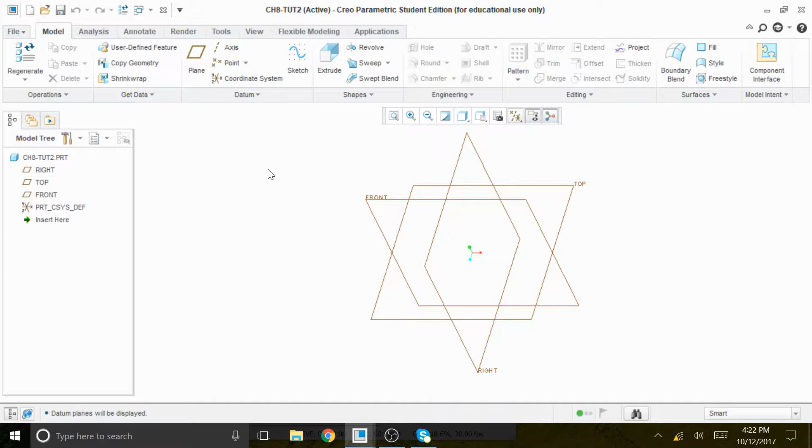We turn the plane on, and we're going to create this octagon on the top datum plane, and the orientation and references should be right. So we're going to do that, and then remove the filter.

This is the secret here: you just place a point at the origin. You don't need x and y axis, just drop a point or place a point there. Then you go to palette, and then you activate the 8-side octagon. Double click, and then you bring it and place it there. Close it.

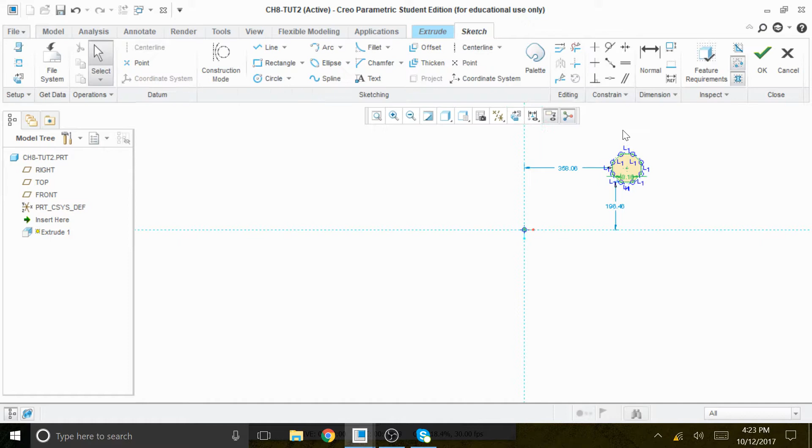Let me see. Okay, so you don't have to do anything, you just say check, and we're gonna coincide. We're gonna go to coincident and click on the center of this octagon and click on where we placed the point, and you can see that we place this octagon here, and then the dimension for the side should be 90. If I delete that 48 to begin with, it's going to give us the dimension of 90.

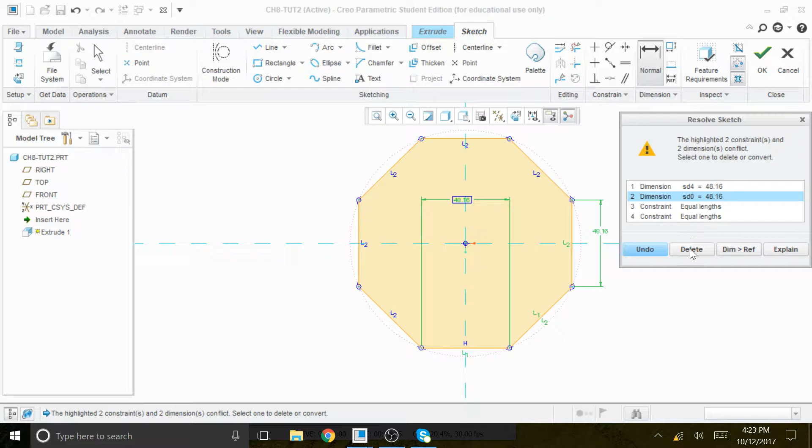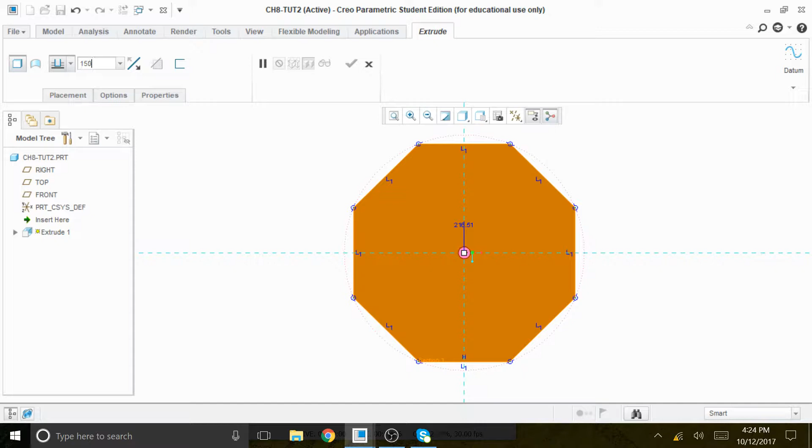48, so we're gonna enter 90. I think that's what it is. All right, 90. And then the amount of extrusion, so now we're going to extrude that about 1500. Yeah, about 1500, so that the total extrusion is 1500. There we go, and now we have this pencil. The body of the pencil is 1500, and this is the front view. That's the front view, and this is the top view.

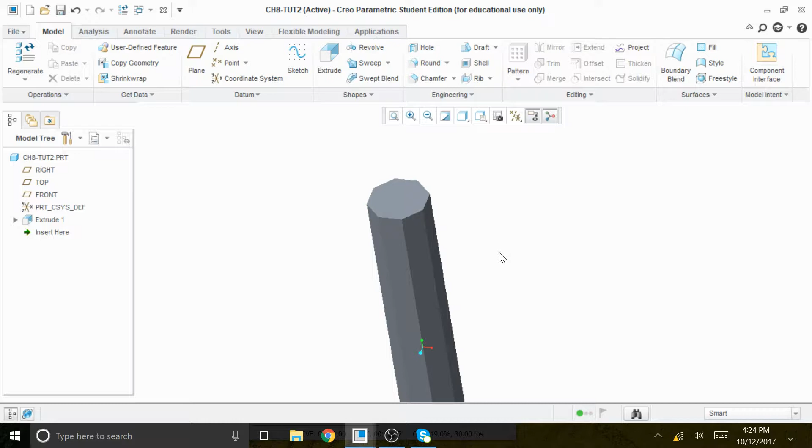Next, we're going to create the next feature. It says creating the second feature: we need to create a circle with a diameter of 120. So we're going to create extrude, placement define on this top surface, and create a circle with a diameter of 120, right?

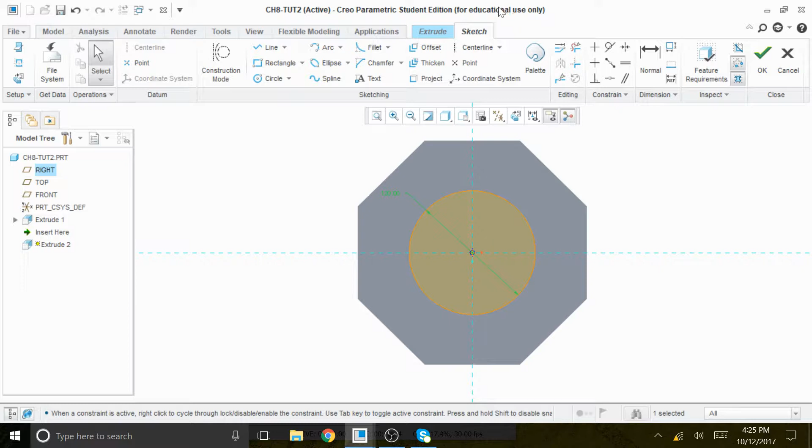120, and this should be extruded upward around 210. So we're going to extrude that in this direction, 210. That's according to the specification, it says just extrude 210, and we are happy with that.

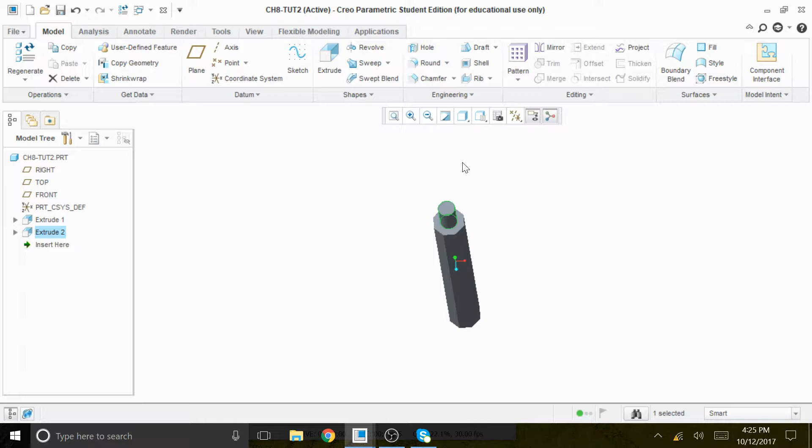All right, so next we're going to use the draft feature. You have never used a draft feature before, but this is the procedure for creating a draft feature. So we're going to go to draft, this is create a draft feature. Click on that command, and then it says select the cylindrical surface of the cylinder. This is the cylindrical portion of the cylinder.

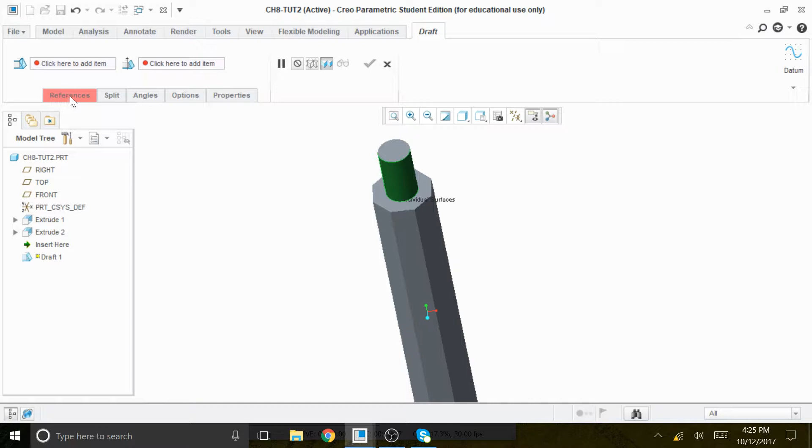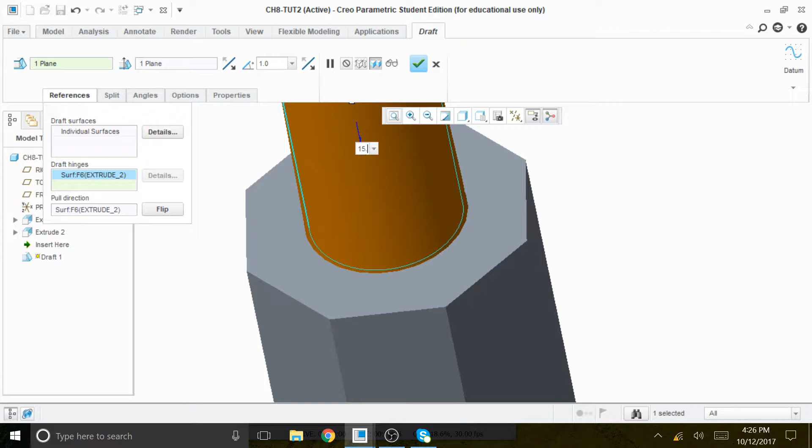Then it says select the cylindrical surface of the cylinder, choose the reference, and then choose the draft hinges. Click on the draft hinges, then select the top face of the cylinder. This is the top face of the cylinder. Then you reverse the arrow, and then give an angle of 15.3 degrees. So you just click on the angle of 15.3. I don't know why they picked that number, but that's the way it is sometimes.

Okay, so that's the hinge. But now we have to go to options and say extend intersects all surfaces. There we go, that looks beautiful, correct? So all right, so that's what we have.

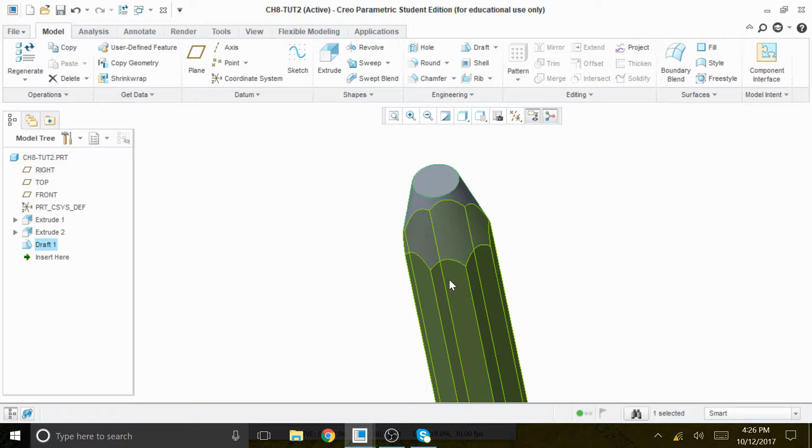Next, we're going to create the tip of the pencil. So in order to do that, we're going to create that on the front datum plane. So we go to—is this revolve?

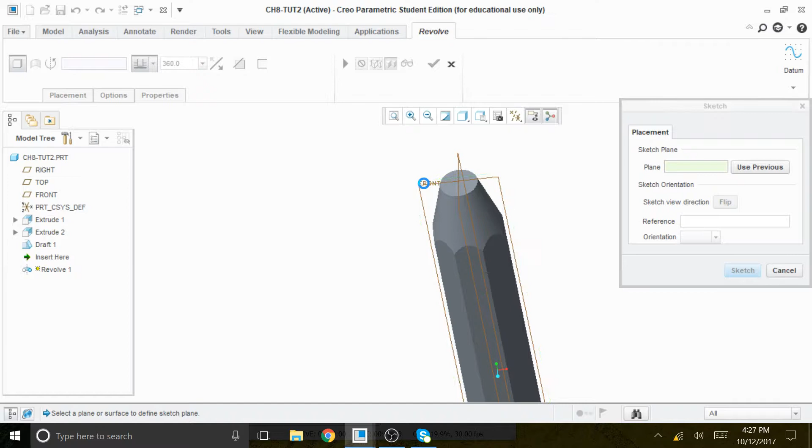We're going to use revolve, placement define on the front datum plane, and then we're going to click on top surface, and then don't forget to orient it to be top, top sketch view. It's going to come toward you, and nicely done. Let me just get rid of all the filter so you can see it.

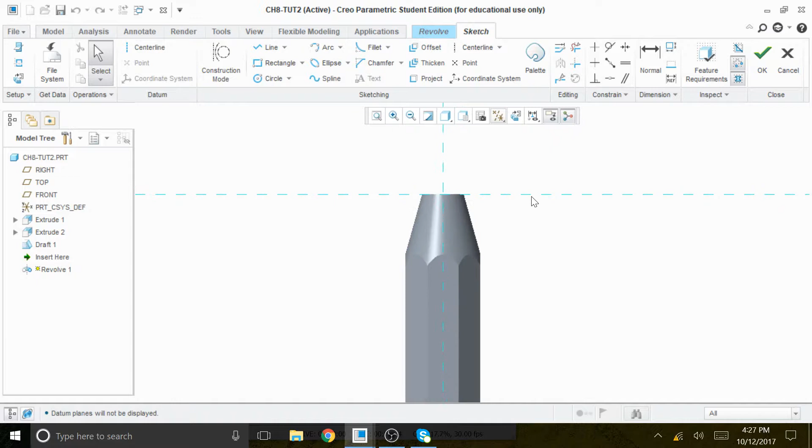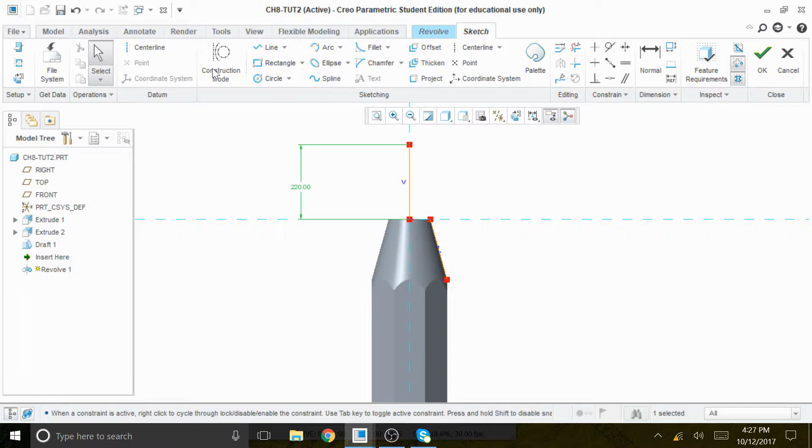Now I'm going to place a project somewhere here. The rest is okay, the references are fine. So we're going to draw a line from here to there, and that should be 220. From there to there is 220. And then we're going to bring it down, from here to here, we go back to the origin.

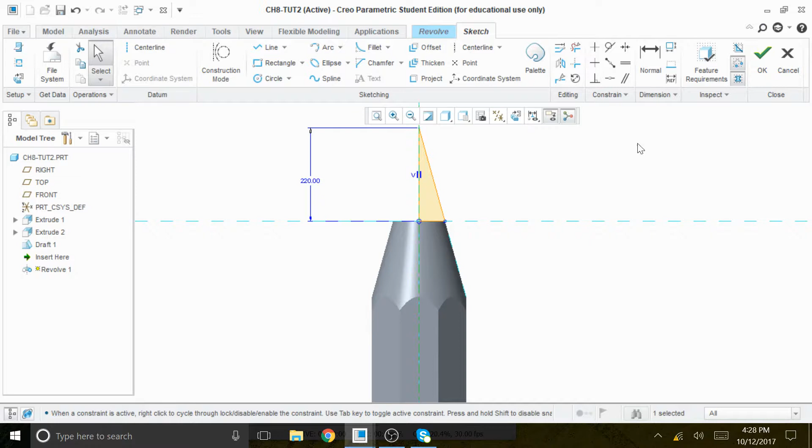So that's a portion of the revolve, and don't forget to remove that temporary line. That's it, that's all you need to do. One thing we forgot to do is the reference axis of symmetry, the symmetrical axis. So when you check it, now you can see that, and this is the tip of the pencil.

And the tip of the pencil we can render it and make it look, any color you want. Maybe we're gonna pick which one is good. This one. Okay, let's see.

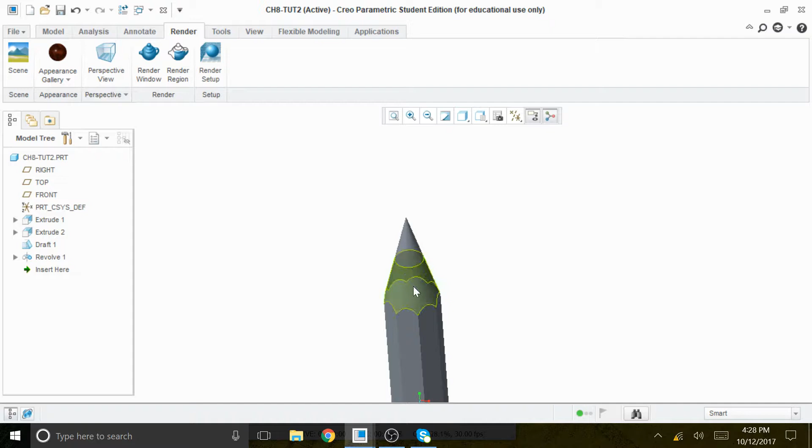Okay, we're gonna pick that to be this one, and then maybe we can pick that to be here. Okay, so that's our pencil for the time being, the top portion of it. Now the bottom portion. Okay, this is the interesting part.

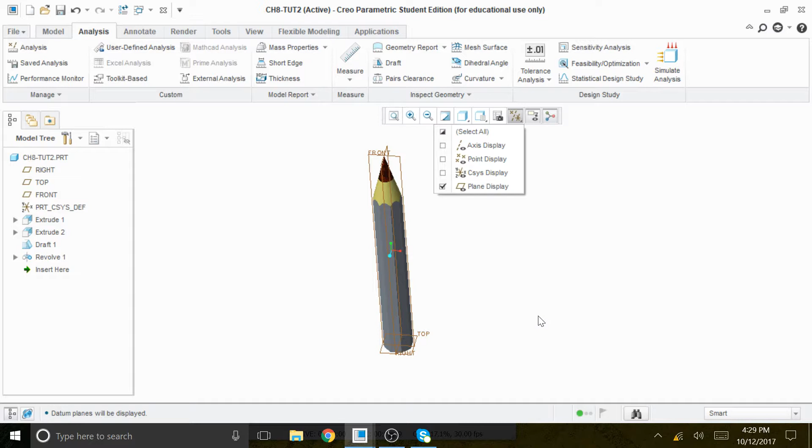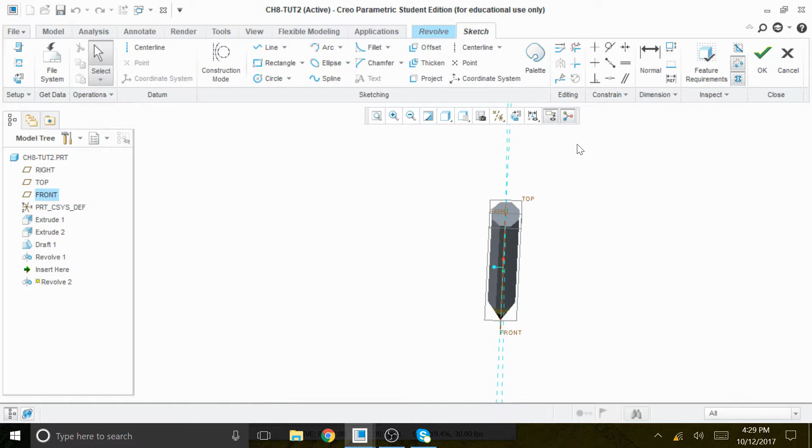Let me activate the plane again, because the bottom of the eraser portion of the pencil, it says again to create this on the frontal plane. Okay, sketch the frontal plane, and this is what I will do. I'm gonna go this way here, click on the model, and we're gonna do the revolve again. Okay, revolve, and then we click on the frontal plane, and then let me see if it's gonna work. Okay, no, I did not like that.

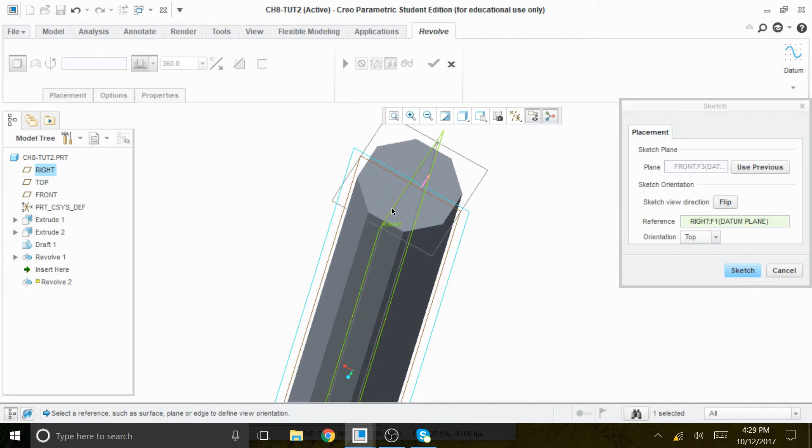So let me just, because it went too fast. So we're gonna go to revolve, placement, define. We're gonna click on the front, and then let me rotate this here a little bit so you can see that. We click on the surface, and then surface, and then top sketch. All right, that's what we want. Okay, that orientation is better. Okay, so next we need to put maybe the reference, the center line for the axis of revolution.

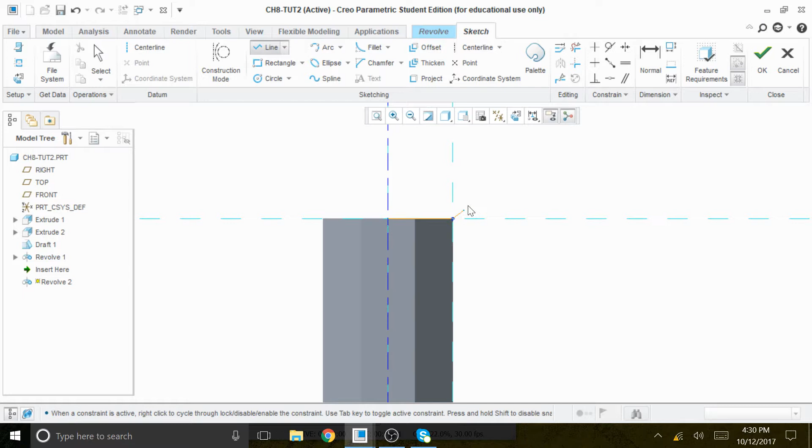And this dimension, probably that dimension is going to be 240, right? The total is, let me see, let me just make sure the references here is secure. Okay, that dimension, and I'm going to create a line from there to there, and that measurement is not giving me the measurement.

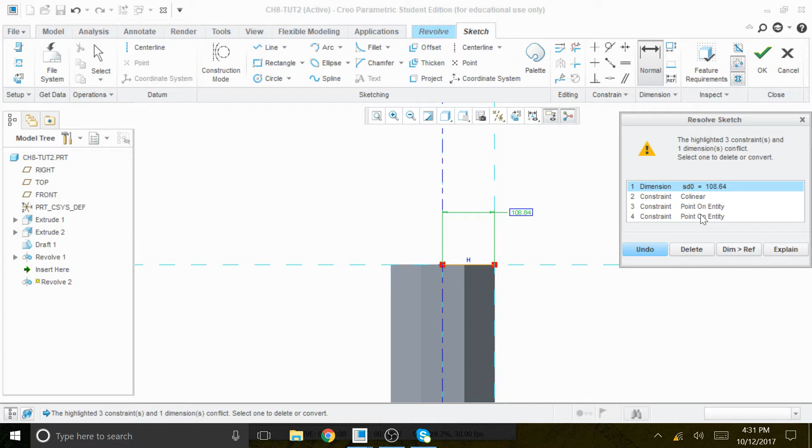Let me see. Okay, if I go to dimension, if I create, because we have a reference axis, automatically they should give us that. Okay, let me just delete this here. I'm gonna go straight up from there to there, which is 160, right? 160. And so we're gonna enter the dimension 160, and that is what that is, right?

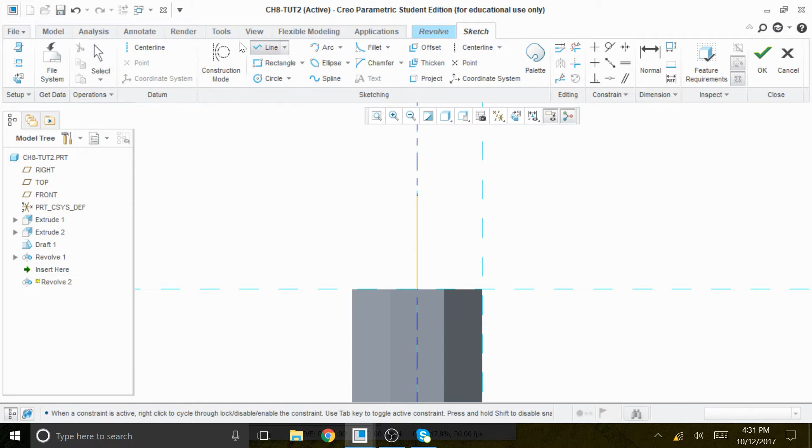And then we can create a line from here to there, and now it's going to give us the total dimension of that one, which will be, let's see, 200. Okay, so we're going to enter the dimension of 200, correct?

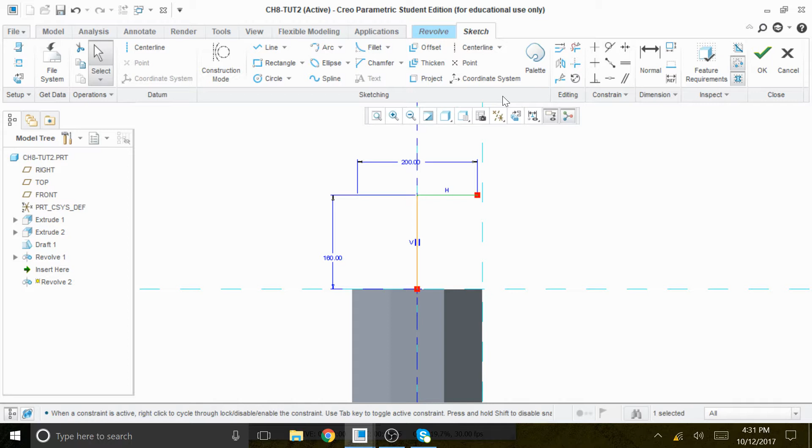So next we're going to bring this down about 32. Okay, because the dimension, let me tell you this, if you are following the textbook, the dimensions are really wrong, so you can make up your own dimension or just follow the dimension that I'm entering. Either way, okay, you can make up your own dimension if you want. So we're gonna give a dimension of 32, okay, 32.

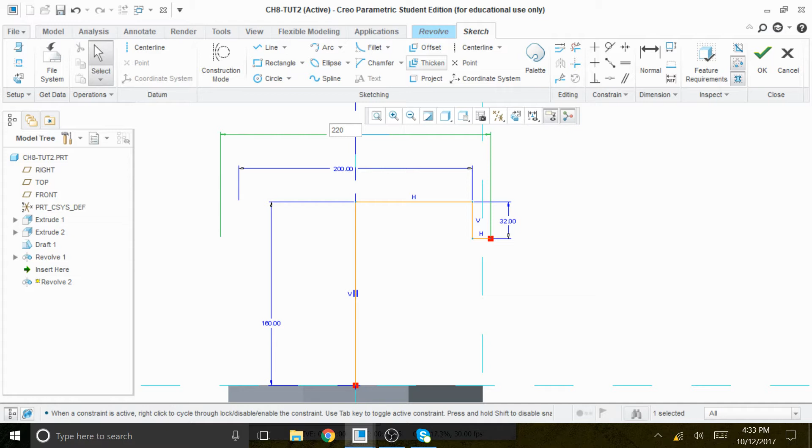Then I'm gonna have a portion of this here that should be about, this is, I'm trying to find the dimension there, which is 10, right? So I'm gonna go out a horizontal line, and that dimension should be about 10, or this is 220, okay? Or I'm gonna make this to be 220, okay? 220. All right, very good. Okay, very good, 220, right?

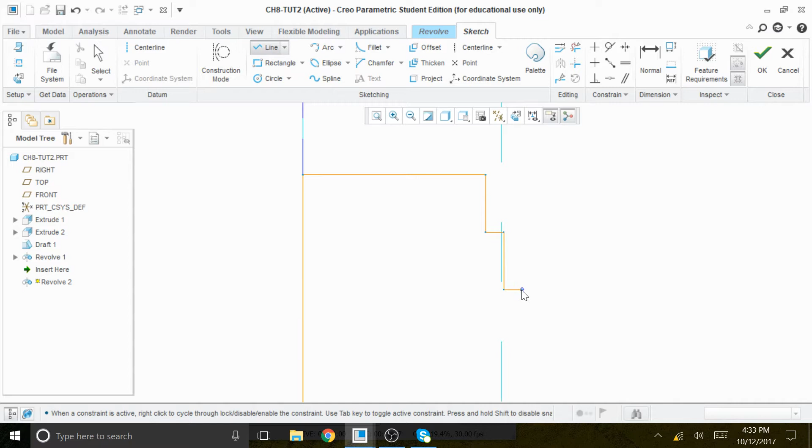220. Then I'm gonna go down another 32, right? Another 32. Okay, let's see if I go down from here another 32, which is equivalent to, I'm gonna make it equal length. Okay, equal length. So that's that. And then we go again equal length to this one. That is equal length, right? So that should be 10 also, right? 10. So I'm gonna make it equal length, and then I'm gonna go down about 13 or 14.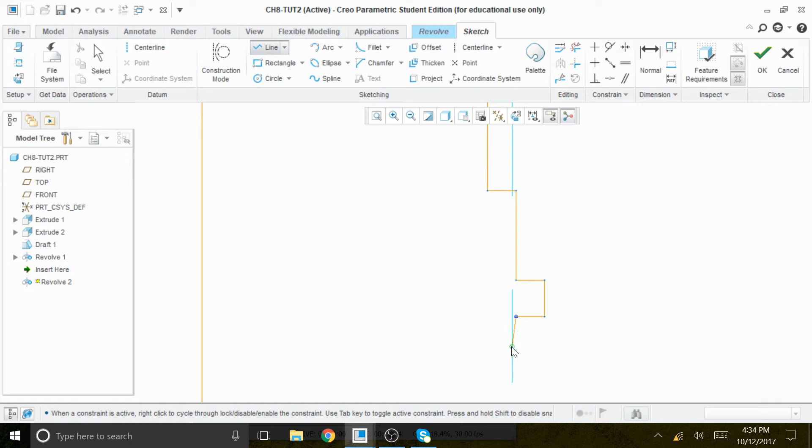It's up to you. Okay, you can make it 13, 13, and then we can again zigzag. We're gonna create this part here to be equal length, and then we go down, and that dimension is, let me see if it's 15, right? So we can go down about 15 units. Okay, so we can go about 15.

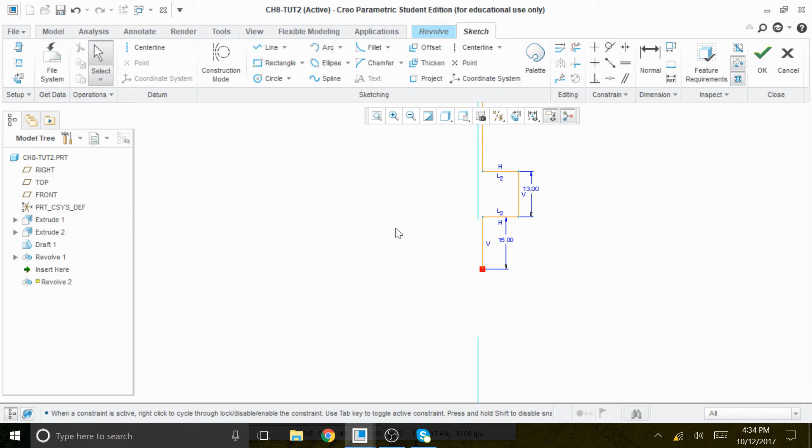Again, we're making up the dimension. Okay, the dimension is not accurate in the book. Okay, 15, and then we can create again, this is equal length, and that will be 13, the same as that. So we can make it equal length, and then we make it equal length. Okay, this one, yeah, okay, and then we go down all the way to the bottom, right?

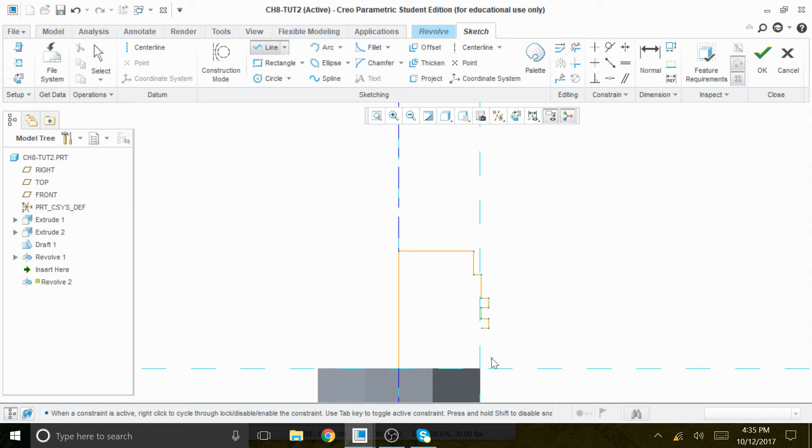Which is 50. Okay, so we can go down, maybe we have that dimension to be 50. 50. Sorry about that, it seems like we are short a little bit, huh? Short. So let's see if we can make that line all the way to there, and then we can just make this line, we are a little bit short because of the measurement. Okay, so let's just see.

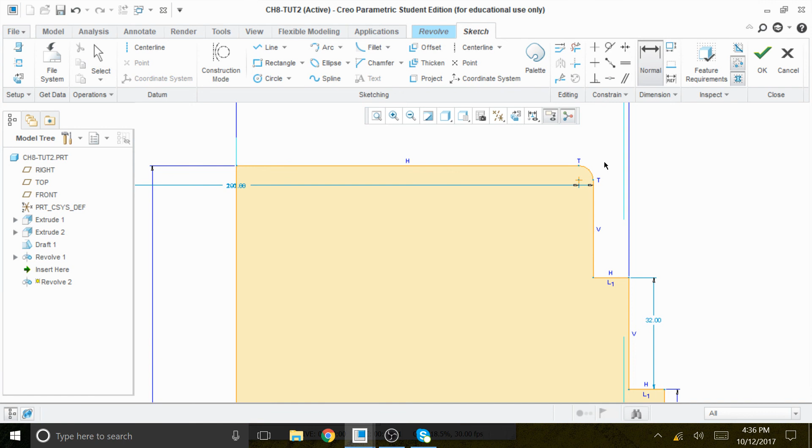Okay, excellent. So we have this all shaded. That means it's complete. And we need to put a fillet radius of 5 units, circular trim. So we're going to put a fillet radius of 5. Okay, we're almost there. 5, that's good, good to go. And we go revolve. And there, that's the pencil portion.

And then we are happy. Okay, and that's about it. Okay, and then